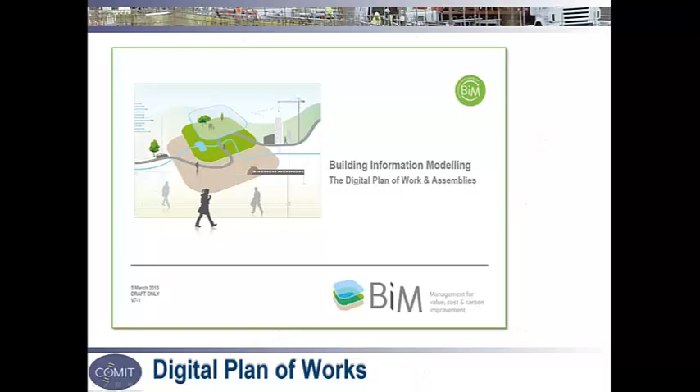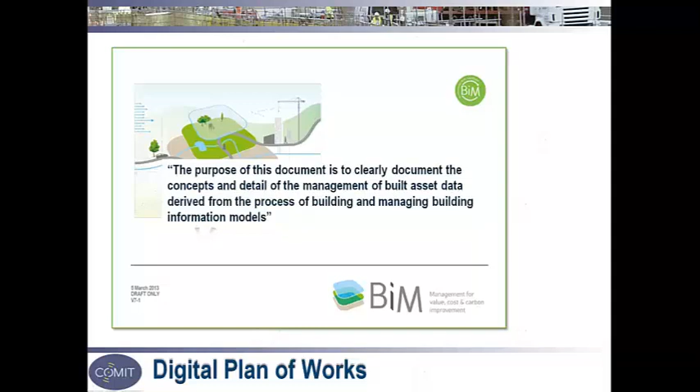One of the most important documents that can be found in the labs area is the Digital Plan of Works. This provides the backbone, structure, foundations, whatever you want to call it, of BIM, clearly setting out both the concepts and detail of management of built asset data derived from the process of building and managing building information models.

Here's an example. If I told you that one of the bulbs in your living room needed replacing, what questions do you need to answer before you can do that? Things like which bulb, what's its rating, where do I go for the replacement, and even further down the line of, oh look, if I buy 10 I can get them for half price. Will the others also need replacing soon as well? Not to mention the time it took to get home, get the ladder, unscrew the shade, get the bulb out, etc. etc.

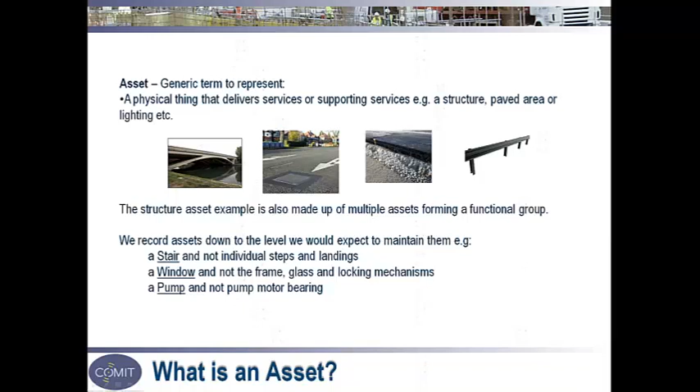So what do we define as an asset? Well, an asset is a physical thing that delivers services or supporting services. For example, a structure, paved area, lighting. The structure asset example is also made up of multiple assets forming a functional group. We record assets down to the level we would expect to maintain them. For example, a stair, not the individual steps and landings, a window, not the frame, glass or locking mechanisms, a pump, and not the pump motor bearing.

To help us put a structure to our assets, we need to look at them in this way. At the top of the tree is a complex, a network, if you will, of our assets. This could be a rail network, a power grid, waterways, whatever. This complex is made up of multiple facilities.

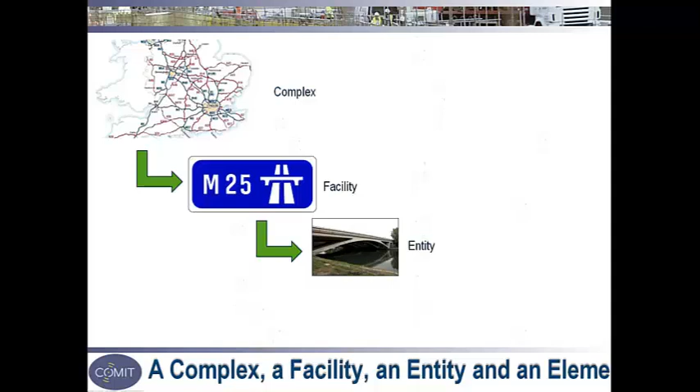In highway terms, they are roads and hubs that join them. In rail, it could be the lines and the stations between them. So similar with water and power. The facility has multiple entities along it that carry out functions, such as taking the facility over a river, providing lighting or drainage. Those entities are made up of elements, which are the lowest level of a maintainable asset.

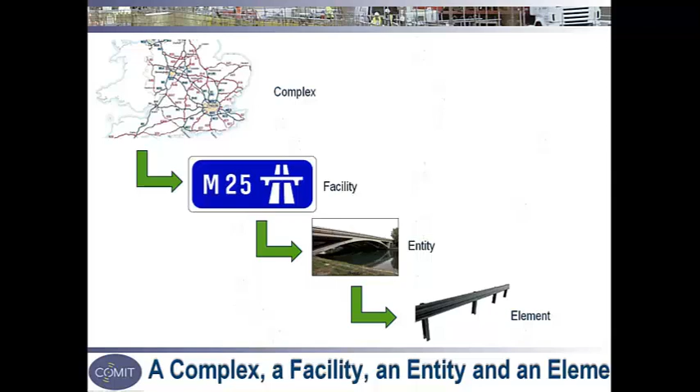So in this example, we have a safety barrier element of a bridge entity, which is carrying out a function along the M25, which is part of the Highways Agency's complex. Simple.

Each of those entities and elements have a tag. This tag is made up of 3 pieces of information that help us identify it. Firstly, the location. Where is it? Let's say it's on the M25. Classification. Let's say this is part of the paved area entity. Function, and its surface course element of that entity.

Then we add a unique ID to this specific instance of the asset. Don't worry, the idea isn't to label every asset, but when it's modelled, it will need to have a tag to associate it with an asset register.

Most organisations have had great documented methodologies for moving information through a workflow and establishing a consistent quality of information throughout the life cycle of an asset. That's great if you're a sole contractor on a building, but infrastructure is slightly different, requiring collaboration between many different organisations to produce the asset.

Due to the fragmented nature of our industry, it has been decided to lay out a standard that defined a common methodology for managing the production, distribution and quality of construction information, including that generated by CAD systems, using a disciplined process for collaboration and a specified naming policy. This standard, called BS 1192-2007, delivered us a baseline to start aligning our organisations.

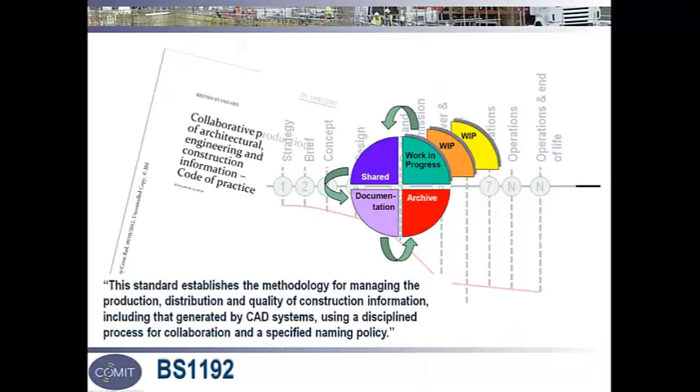When the BIM Task Group was set up, it was recognised that BS 1192-2007 was a great place to start, and this was enhanced to set down the requirements for achieving what is known as Level 2 BIM in 2013 by the release of PAS 1192 Part 2. This is going to be further augmented by PAS 1192 Part 3, which looks at the operational phase of an asset, and PAS 1192 Part 4, delivering the methodology of delivering the client information requirements through COBie.

COBie. What happens if you type Cobie into Google? You get a lovely young lady called Cobie Smulders. However, that's not what we're here for.

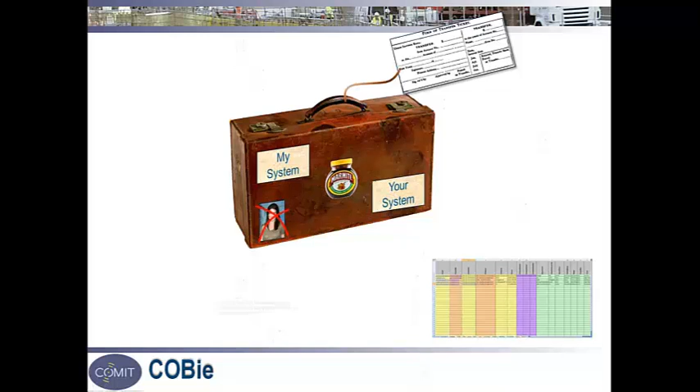COBie stands for Construction Operations Building Information Exchange. Like the BIM acronym, it suffers from having the word building in the title and is currently not fit for infrastructure with an inability to handle linear assets. However, the government has mandated that to achieve Level 2 BIM, you need to both receive and deliver information in COBie format. It scares most people who see it as an overly complicated spreadsheet of mind-boggling proportions.

However, you need to think of it simply as a suitcase that delivers information from one place to another, be that a system, company or project. Love it or hate it, it is a requirement that all information is transferred in this manner.

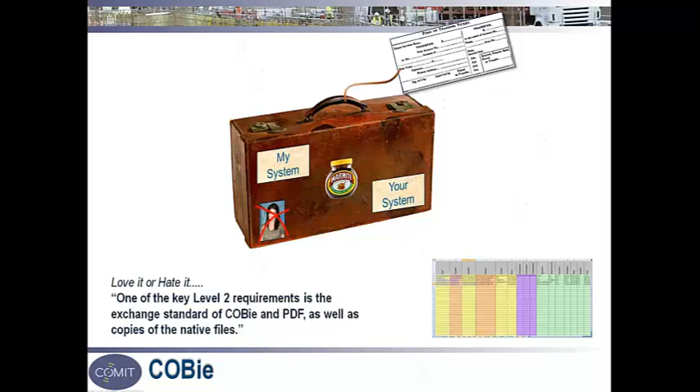Uniclass 2 went some way to dealing with the larger classification of assets and ensuring it will work for buildings delivering BIM Level 2. Uniclass for infrastructure is a current task group that is defining the classification systems suitable for all infrastructure. I encourage you to get involved.

To ensure every asset has the correct information, measured in the correct way, Crossrail created an Asset Definition Dictionary, and in this was an AD4, an Asset Data Dictionary Definition document, AD4 for short, for each asset at element, entity and facility level. These are also being replicated for HS2, Thames Tideway and other major infrastructure projects. These delivered attribute information for operations and maintenance only.

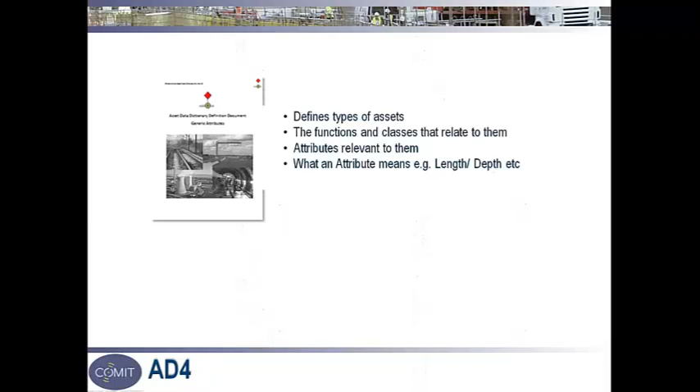IAD4 UK is an initiative looking at creating a common dictionary across all infrastructure so that whoever you are delivering an asset to, be it road, rail, power, water, you'll always deliver the same information in the same format. It will also deliver the required information for the briefing, design, construction, operations, data drops.

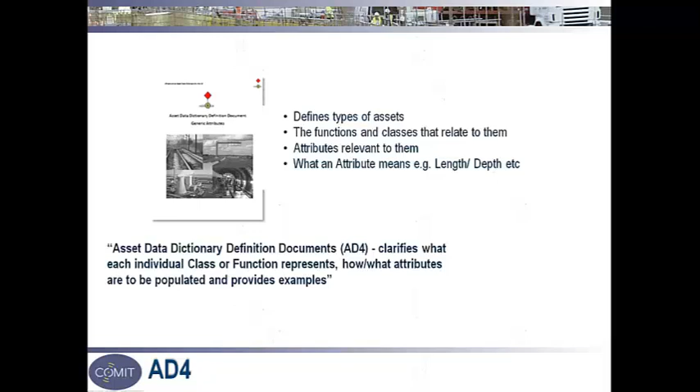So what about those data drops? Well, before we describe them, you need to understand employers' requirements. In simple terms, these are the answers to plain language questions that the client asks at the end of each stage of a project. These will help them make informed decisions about options, assure them the contractor has understood the briefing and is going to build it correctly, and they know everything they need to know about their new asset.

It's like buying a car. The manual tells you all you need to know about running it. Without that manual, how do you know what pressure to inflate the tyres, what type of oil you need, and what button does what? In these diagrams, they are usually depicted as a red diamond.

You remember this diagram. It represents the life cycle of an asset from cradle to grave. Throughout that life cycle, the employer will need information to answer his questions. These are represented by the green footballs. This information comes in 7 data drops: strategy, brief, concept, design, build and commission, handover and closeout, operations, which include things like maintenance and the end of life.

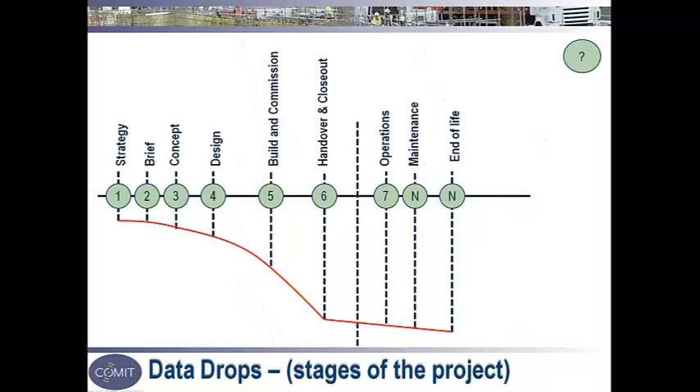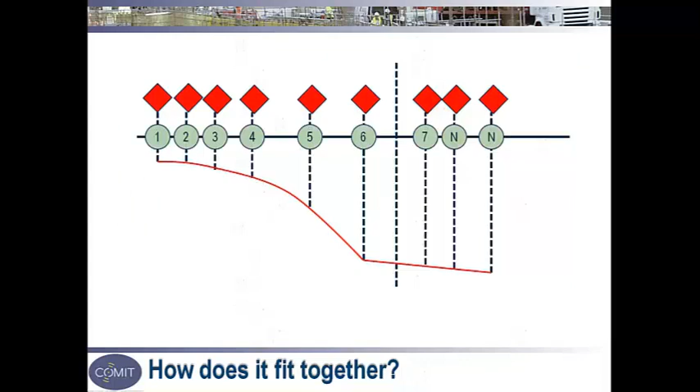So how do all these fit together? Okay, so we have the employer's requirements, the plain language questions represented by those red diamonds. Then we have the data drops, which are the answers to those questions. COBie is the suitcase that transports those answers. Uniclass classifies the answers. The AD4s provide the details. The digital plan of works describes the whole process.

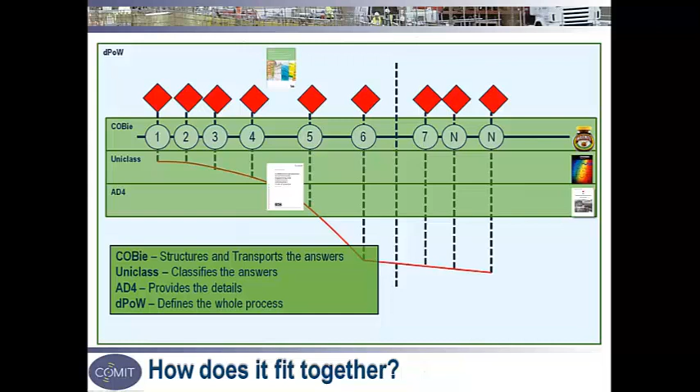BS 1192:2007 established the methodology for managing the production, distribution, and quality of construction information, including that generated by CAD systems, using a disciplined process for collaboration and a specific naming policy. PAS 1192 Part 2 specified the requirements for achieving building information modelling level 2.

PAS 1192 Part 3 focuses on the operational phase of assets, irrespective of whether these were commissioned through direct capital works, acquired through transfer of ownership, or already existing in the asset portfolio. And PAS 1192 Part 4 defines the collaborative production of architectural, engineering, construction information, client information requirements through COBie.

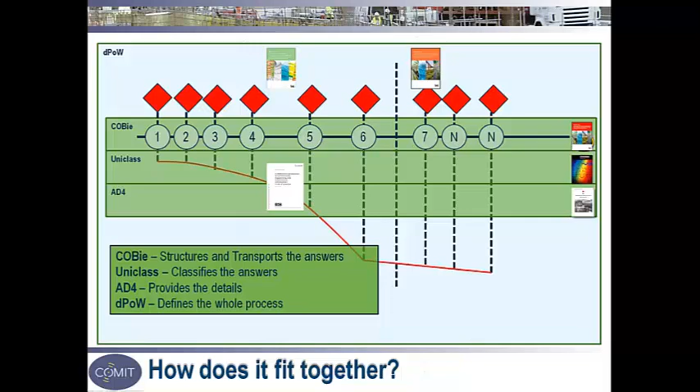Only about 20% of that information is CAD, but it delivers an impact on those client plain language questions that is proportionally larger than that. As they say, a picture paints 1,000 words. We start off with the briefing and concept phases, delivering basic 2D and 3D models, moving through to the detailed design phase, where we should be modelling in 3D and extracting our drawings directly from it.

During the construction and commissioning phases, we look at 4D over time and 5D over cost. Then when we hand over our information back to the client for operations and maintenance, we need something different again with 6D. Each of these models has a different purpose and a different level of detail. But how we actually define that level of detail and what information is generated when we model at these stages isn't yet clear.

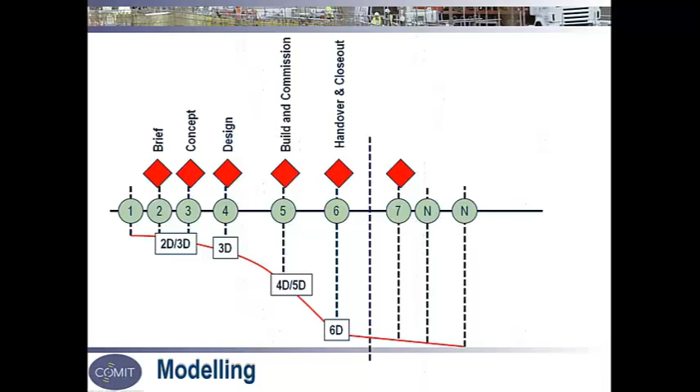So after all that, do you know what BIM means? Well, it'll mean different things to different people. But what you have to realise is this: every part of the supply chain has a different piece of the information puzzle that goes together to answer the client's requirements. Each piece, no matter how small, is important because without it, the puzzle is incomplete.

Thanks for listening, and I can only encourage you to get involved in the above initiatives and start to map out a future beyond 2016.